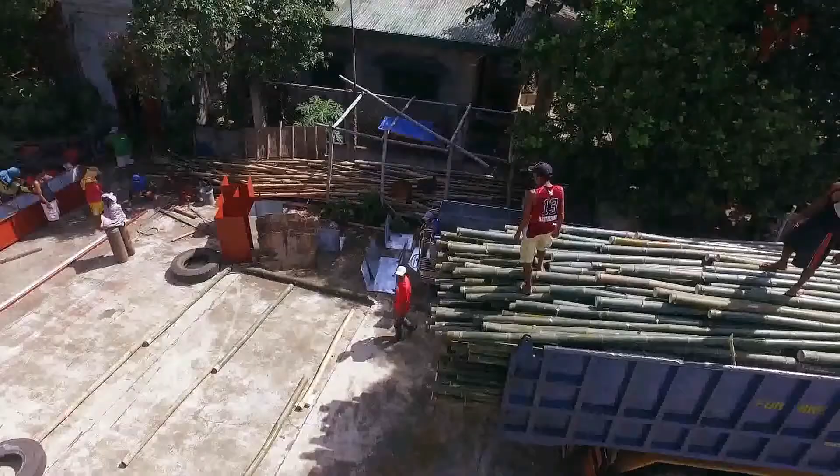The project will be allocating 250 single-detached socialized housing units for the poorest families of informal settlers, specifically the homeless families of the municipality living in Rodriguez, Rizal.

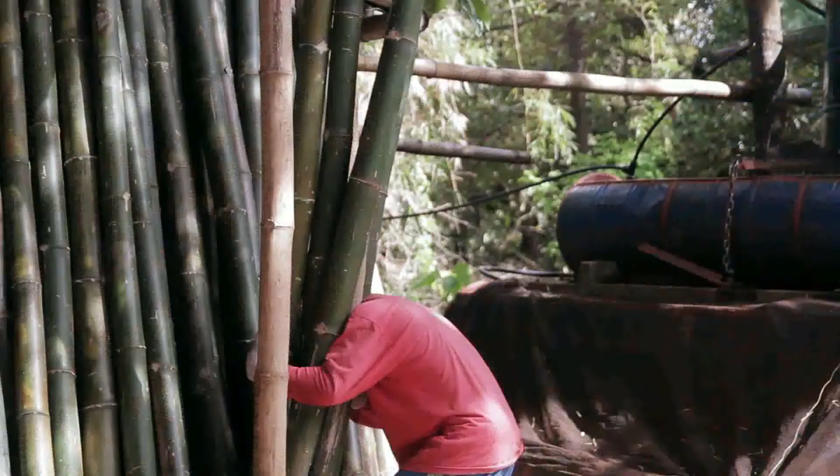At a recent forum organized by the Manila Times, the Department of Human Settlements and Urban Development reported that the country's housing backlog stood at 6.75 million units. Worse, the number could balloon to 22 million units by 2040. If that problem was not properly addressed today, alongside the problem of housing projects built by the government far from where livelihoods are available, having these sets of information and problems, creation of socialized, low-cost, sustainable cement bamboo housing should be proposed.

The stakeholders are the poorest families of informal settlers, specifically the homeless families of the municipality living in Rodriguez Rizal. An informal settlers density map of Rodriguez Rizal shows informal settlers residing in every barangay of the municipality.

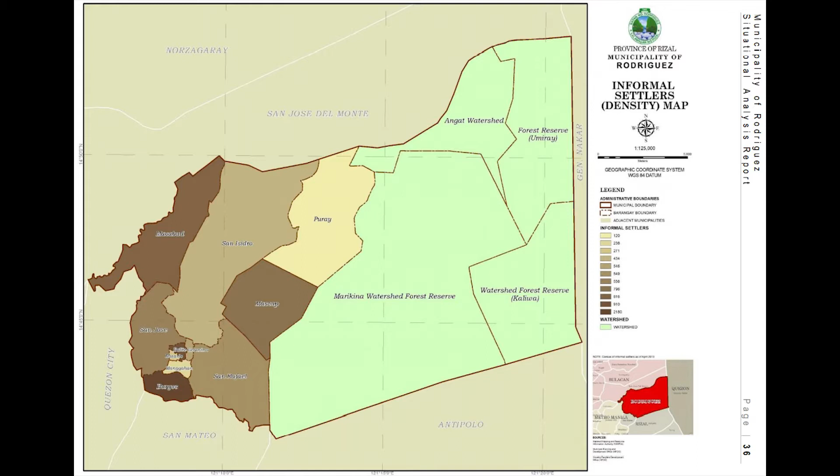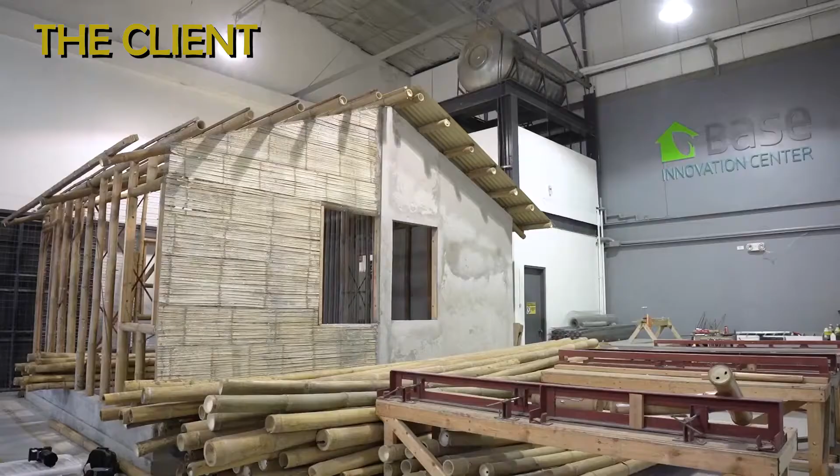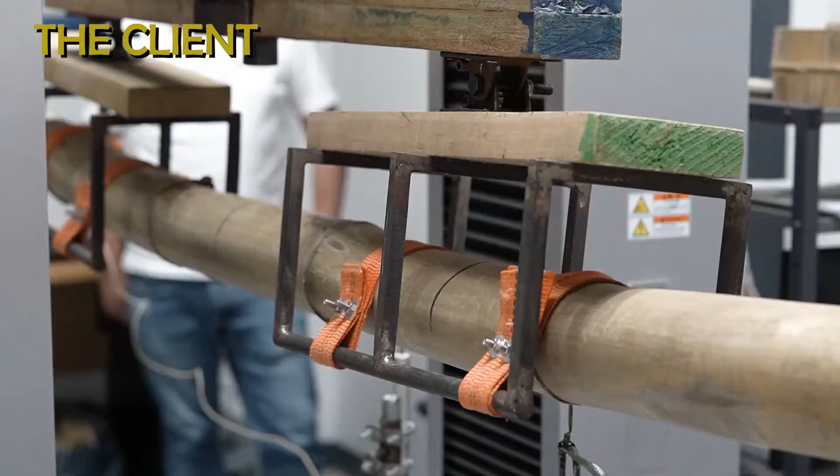Base Builds, headquartered in Singapore, currently operates in the Philippines through their subsidiary Base Bahay Incorporated. Base is a non-profit organization initiated and supported by the Hilti Foundation, a community organization that provides alternative building technologies to enable a network of partners to build quality socialized homes that are comfortable, affordable, disaster resilient, ecologically friendly, and with social impact.

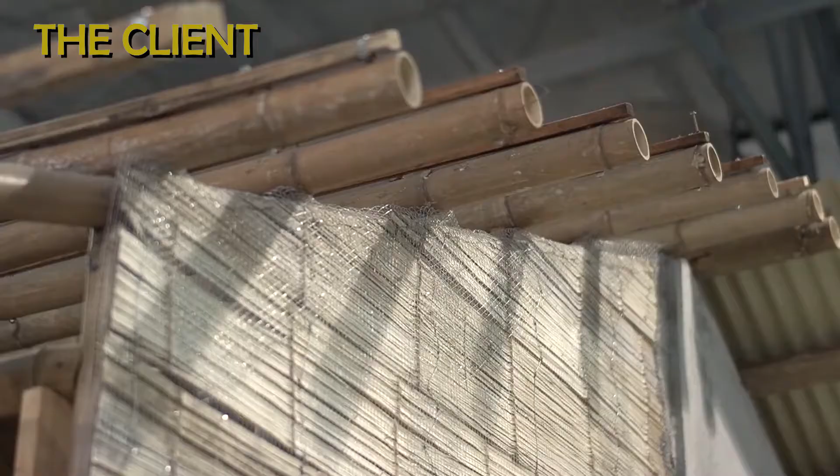Base Builds has already built 12 socialized housing projects in the Philippines, summing to 800 units of socialized housing.

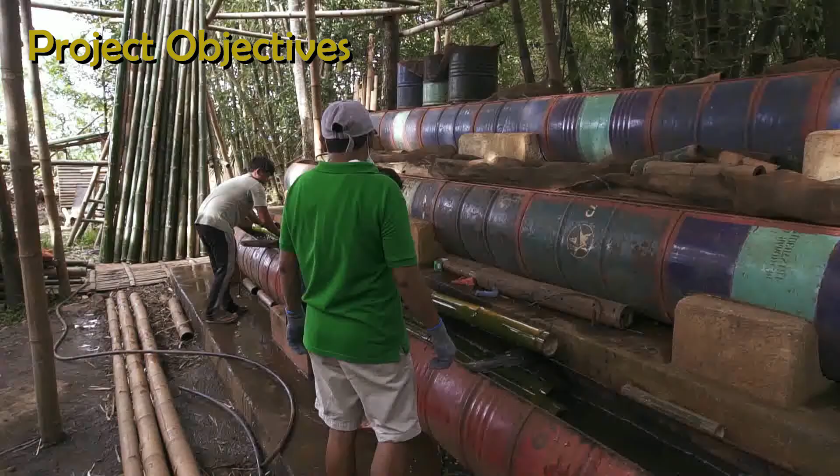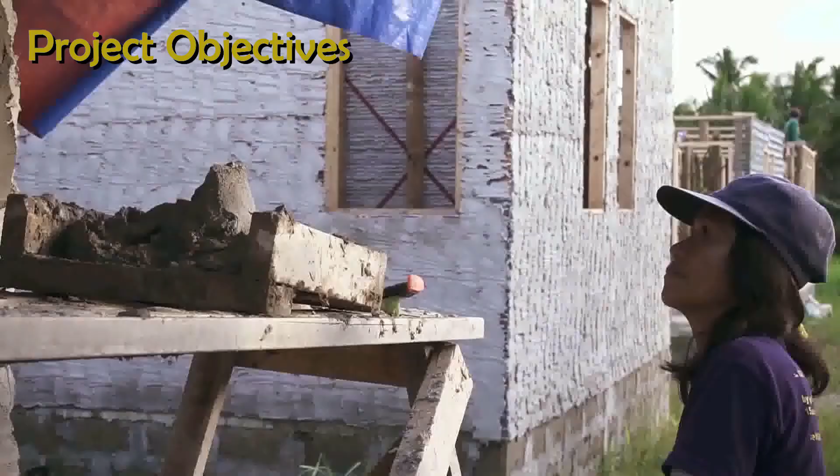To offer an effective housing project design to the homeless families of the municipality living in Rodriguez Rizal, also to provide housing that is near where their livelihood is, to promote vernacular architecture and also promote bamboo as an alternative building material, and in the future industrializing it, to design a village that is incorporated with the livelihood of the stakeholders of Bambusa Blumiana Village, creation of socialized low-cost sustainable cement bamboo housing, to secure new housing for the stakeholders of the socialized low-cost sustainable cement bamboo housing.

The municipality of Rodriguez is situated in the northernmost part of the Rizal province and at the foot of the Sierra Madre Mountains. This spot makes the town positioned at the periphery of Metropolitan Manila. The most practical access to the municipality is by land. There are two routes in accessing Rodriguez. The first route is from Marikina City through the town of San Mateo via JP Rizal and General Antonio Luna Avenue. The second route goes through Payatas, Quezon City via Litex Road, former Manila Gravel Road.

The location of the project will be in San Jose, with 1,045.28 hectares, or 19.55% of the total urban land area. Barangay San Jose is the first barangay that one will pass coming from Quezon City, Commonwealth, Payatas Road.

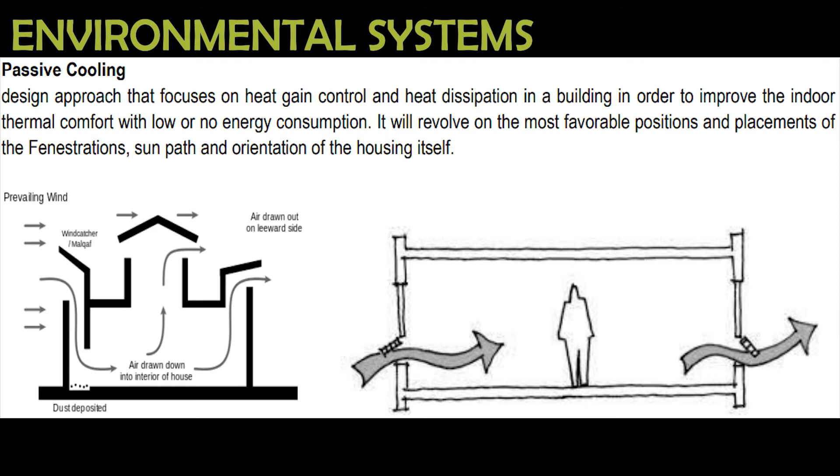The design inputs of the proposal will be based and standardized by the BP 220, which is the Rules and Standards for Economic and Socialized Housing, and the following. Environmental systems incorporated in the project. Passive cooling focuses on heat gain control and heat dissipation in the housing units in order to improve the indoor thermal comfort with low or no energy consumption. It revolves on the most favorable placements of fenestrations, sun path orientation, and the housing itself.

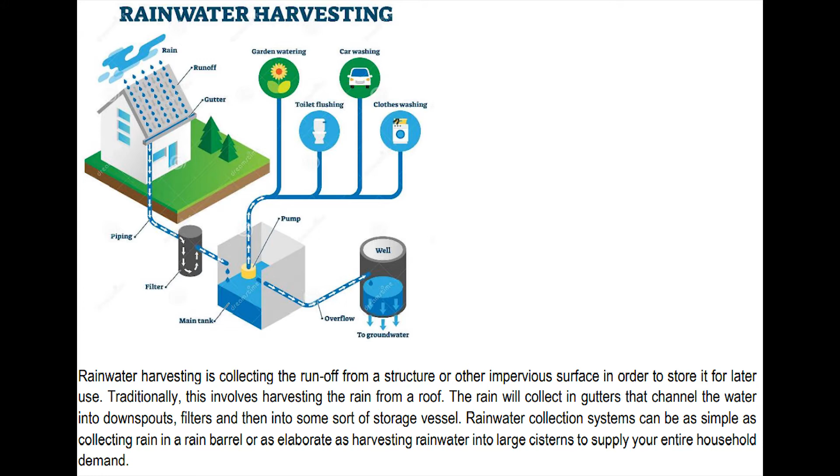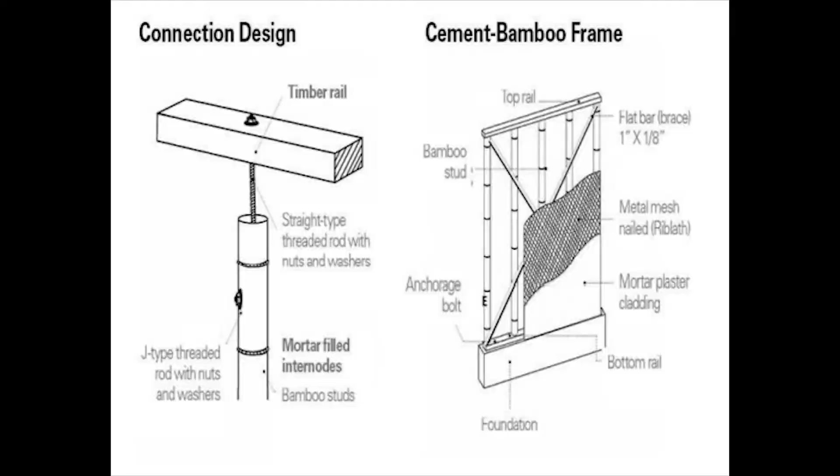Another environmental system that is incorporated in the project is the rainwater harvesting system. It can be used for toilet flushing and garden watering, making the proposal sustainable. The structural system for the housing units will be integrated with the cement bamboo frame technology. Base Builds develop the cement bamboo frame technology and accreditation of innovative technologies for housing. Accredited prefabricated frame system using load-bearing bamboo with metal connections and mortar cement plaster. This system is tested for resistance to earthquake, typhoon, fire, and insect infestation.

Bamboo grading has been implemented in the Dawin Dumaguete Treatment Facility in accordance with ISO 19624 on structural grading of bamboo. A copy of the full ISO may be accessed through the Bureau of Philippine Standards of the Department of Trade and Industry. The anatomy of the Base Bahay bamboo frame technology. Number 1. Roof framing. The frame of the roof uses treated bamboo and is reinforced by quality nuts and bolts. The frames include connectors and reinforcements that are engineered.

Number 2. The roof. The entire roofing structure, which is covered by GI sheets, is designed to allow air circulation for thermal comfort. The structure also prevents water from entering the housing unit. Number 3. Bamboo panels. Connections between bamboo poles are engineered to withstand the impact of earthquake and typhoons. Bamboo poles also provide thermal comfort since the material does not conduct heat. The material does not store heat and cools down quickly in the night for a comfortable sleep.

Number 4. Concrete slab and foundation. Foundations are made with solid concrete design to elevate the house, thus preventing floodwater from seeping in. The use of barrier prevents soil moisture from damaging the panels. Number 5. Metallic mesh cement plaster finish. The bamboo frames are fitted with a steel wire mesh and are then covered with cement to reinforce the bamboo. This method protects the structure from long-term exposure to harmful natural elements.

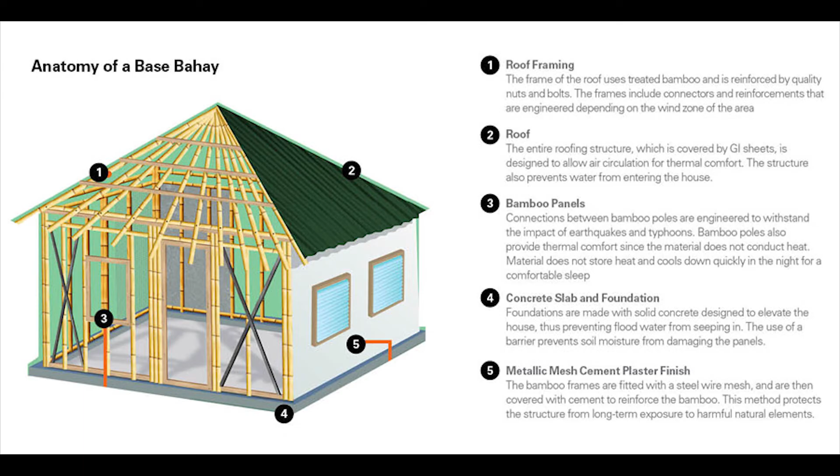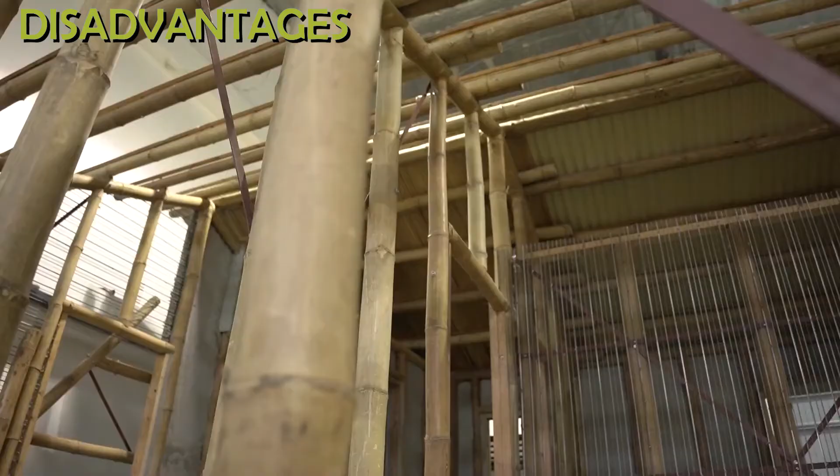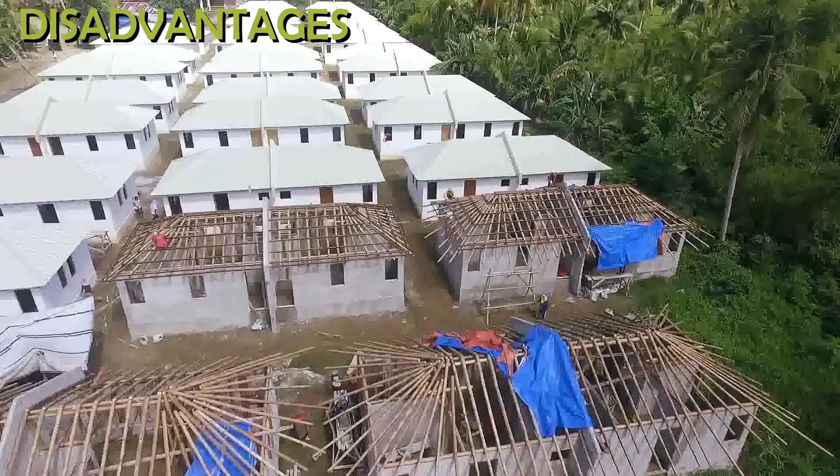Advantages: affordability. It usually costs 8,000 to 9,000 per square meter. For a whole 18 square meter to 25 square meter socialized housing unit, it will total to 210,000 to 240,000 pesos. Disadvantages: bamboo is looked down as a poor man's lumber, often connected to the traditional bahay kubo. But this is not your typical bahay kubo. When bamboo is used to its fullest potential, it's flexible and is a really strong material. It has been tested, researched, and standardized.

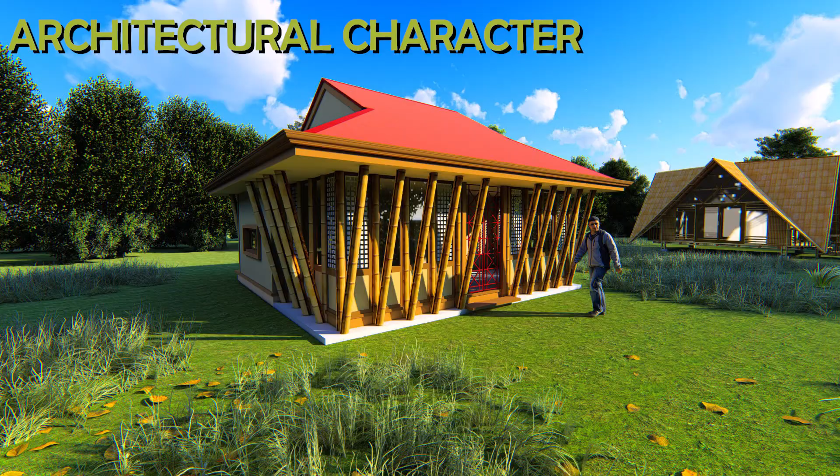Architectural character of the project will be contemporary vernacular architecture. Contemporary and vernacular: while one word defines a type of architecture that's highly progressive, modern, high-tech, and expressive, the other deals with traditional, simple, and practical techniques, the simplest form of addressing human needs. While contemporary architecture is of the 21st century using advanced materials and spread across a global scale, the vernacular is a style that has been existing since the beginning of time, makes use of local materials, and varies from region to region. Contemporary vernacular architecture can be defined as structures that look and feel right for their location, but that have an updated aesthetic and in many cases more functional spaces.